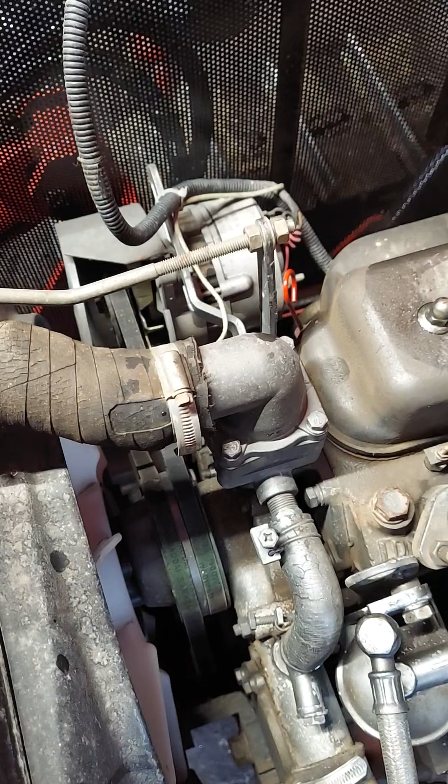But while I was changing the oil, I noticed a couple things and thought I'd share it. While you're working on anything, keep an eye out for things that could cause problems in the future, to save you some time and headache. So while I was putting oil in, this is your oil fill cap, by the way.

While I was putting oil into the motor, I saw this dry rot radiator hose. I thought, well, when I bring this thing in for its 150-hour maintenance, hopefully it lasts another 50 hours, I'll go ahead and swap out the radiator hoses. And while I'm at it, change out the coolant.

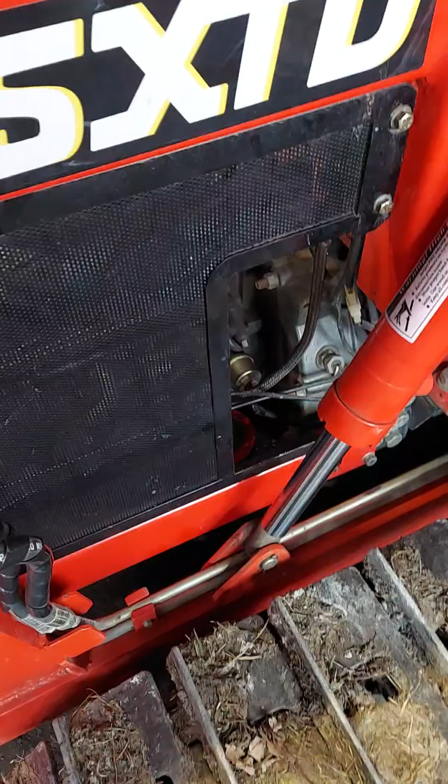Doing that while you're working on machinery, looking for problems, saves you time, because now I can call the parts company and have them ship it. No rush freight, it'll probably be free shipping. Doesn't matter if it gets here tomorrow, doesn't matter if it gets here next month. I'm going to get it, I'm going to have it in time. So that's just something to keep in mind while you're working on stuff.

Keep an eye out. Check your rubber lines, check your fuel lines, look for bare wires, things like that. It'll save you in the long run.

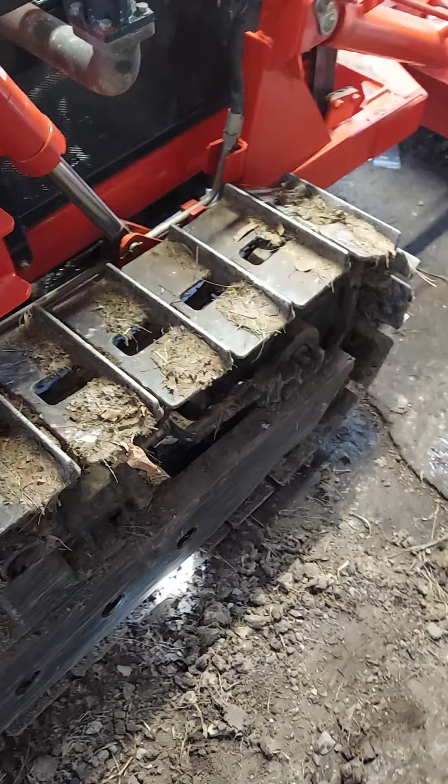The other thing I did between the last video and this video was I tightened the tracks. If you remember from the last video, this track here was really loose. So I went ahead and tightened it.

But I thought, for a first-time buyer, or maybe you have this dozer and just don't know how, or you lost the manual, whatever, it's a pretty simple procedure. Park it on a level, hard surface, is what the manual calls for. I'm fortunate enough to have converted this old barn into a shop with a concrete floor. So yeah, I'm lucky in that way.

But if you're working out in the field or whatever, take your blade and level you off a spot. Yeah, it'll take another 5 or 6 minutes, but it's worth it, because if this is not on level ground and you adjust this track, you might over-tighten it, or not tighten it enough, because the weight of the dozer, being pushed forward or backward, will affect the droop on these tracks.

So get it as level as possible. Put it on blocks, do whatever you need to do. Put some timbers under the blade there and pick the front of the dozer up till you get it level. I mean, there's 1,000 different ways to do this. But anyway...

This is a lock nut here, and I believe it was 18 millimeter. You just loosen that, don't take it out, just loosen it. I loosened this one 5 or 6 full rotations, and that'll give you enough play to turn this.

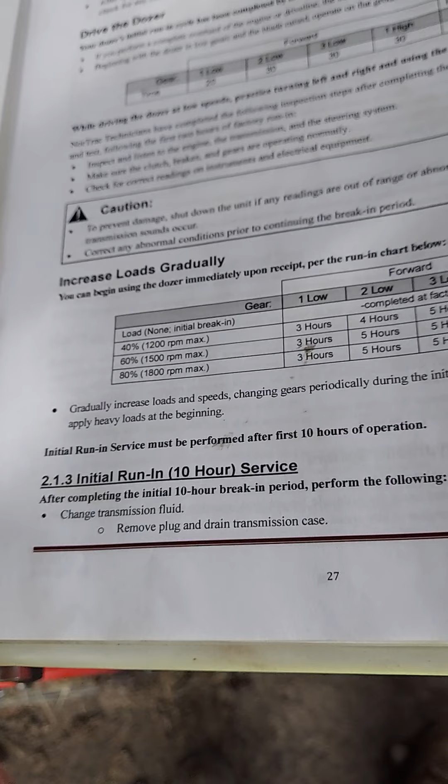Another thing I touched on in the last video, actually I turned to the correct page in it and just didn't even notice, was the 10-hour break-in. It's called the initial run-in 10-hour service. And this is the important one, the one where you run your dozer for 10 hours.

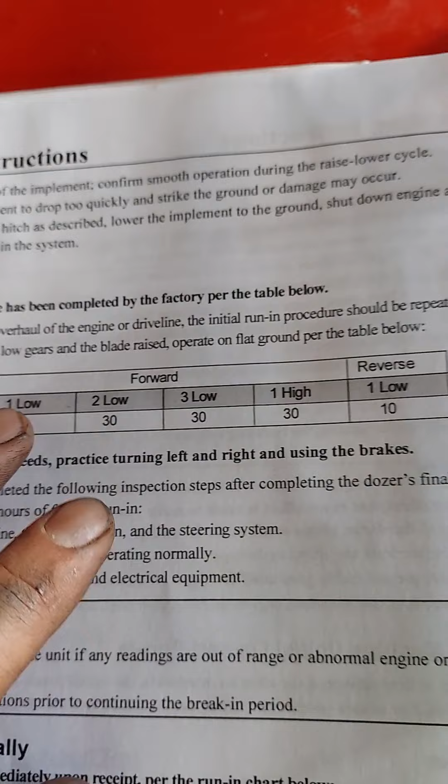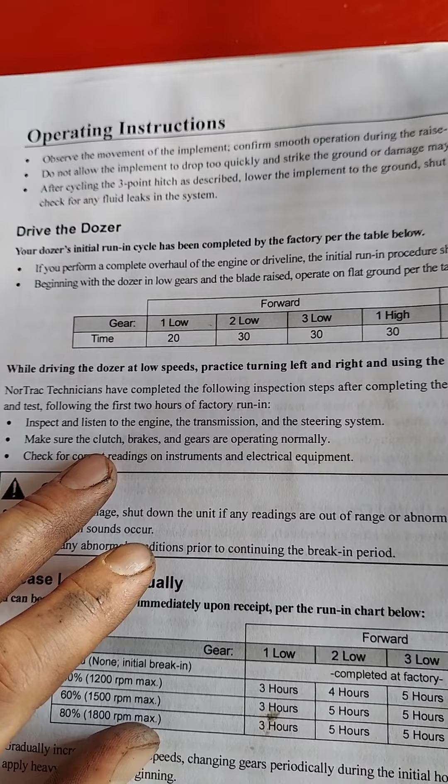And in that 10-hour period, they recommend, I believe these are the hours - driving the dozer speeds, practice turning left using brakes, inspect, listen to engine, make sure - I believe these are the hours that you run it. It's been a while since I've done this.

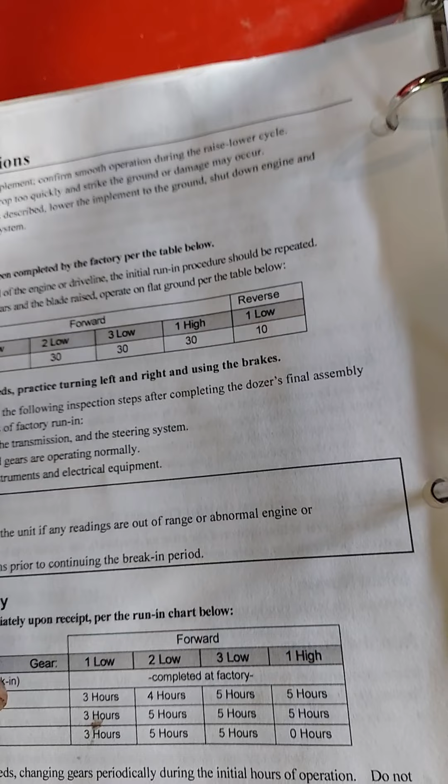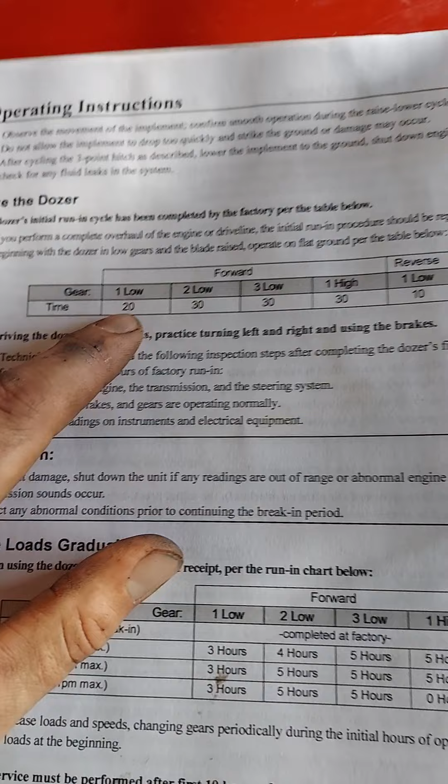I believe I followed this to the hour. These are not minutes - if they are, I just overdid it. But for the first 20 hours, run this thing in first gear low. For 30 hours, run it in second low. The initial break-in is going to take you up past your 100-hour service.

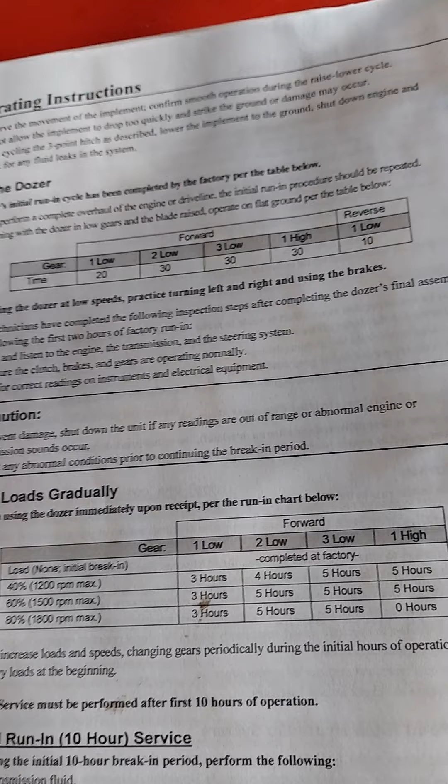I'm going to double check on that. I don't want to tell you right or wrong, but that's how I did it. I used these as hours, not minutes.

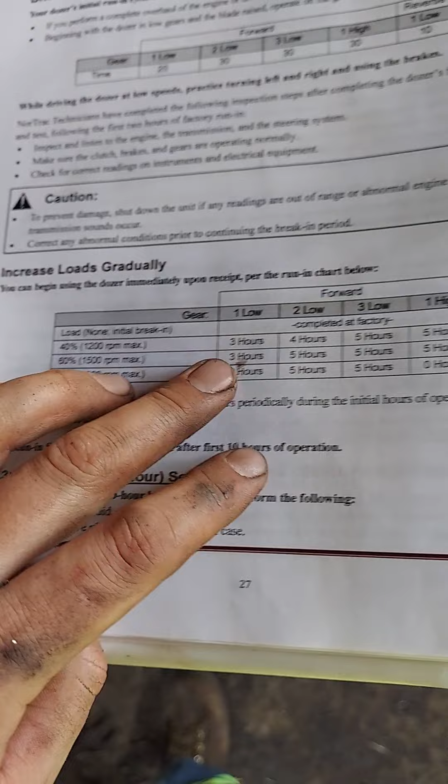This just touches up on that - your load percentage. How I did this was I used the blade. So first one, 40%, 1200 RPM max for 3 hours in first gear low range.

When I was moving dirt, I only used 40% of this blade. For the first few hours, I just barely scraped. You can actually kind of see my wear mark right here.

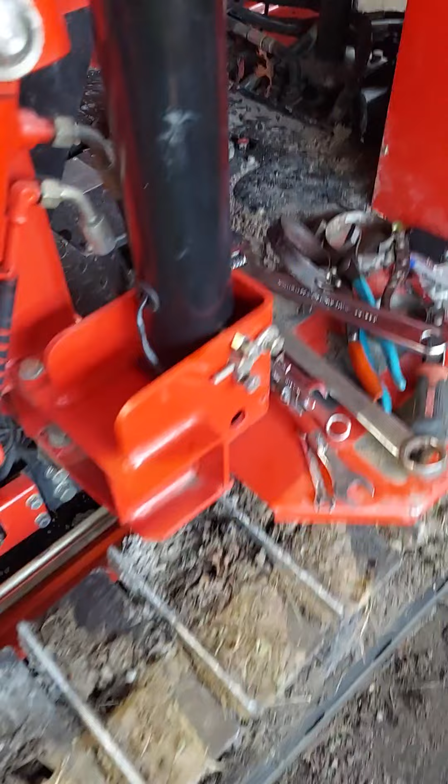It's a pain, I know, because you don't get much done in this first little bit, but trust me, it's worth it. You don't run into the problems that you run into on these reviews that you read.

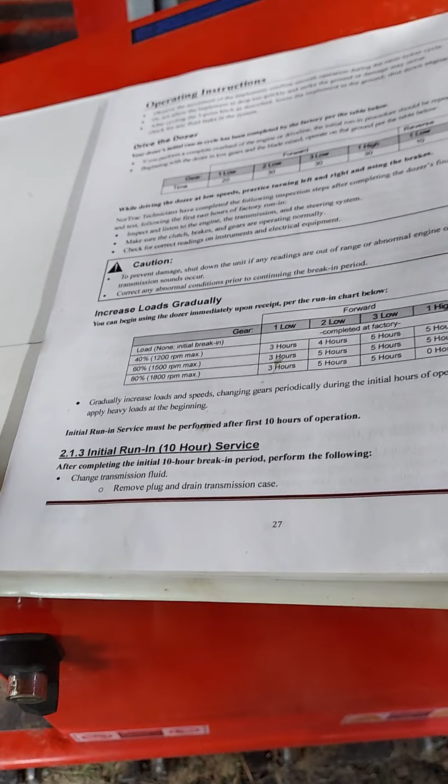But anyway, back to the initial 10-hour service. Once you hit your 10 hours, change your transmission fluid. The plug - well, not the plug, but where you check it and fill it - is right here.

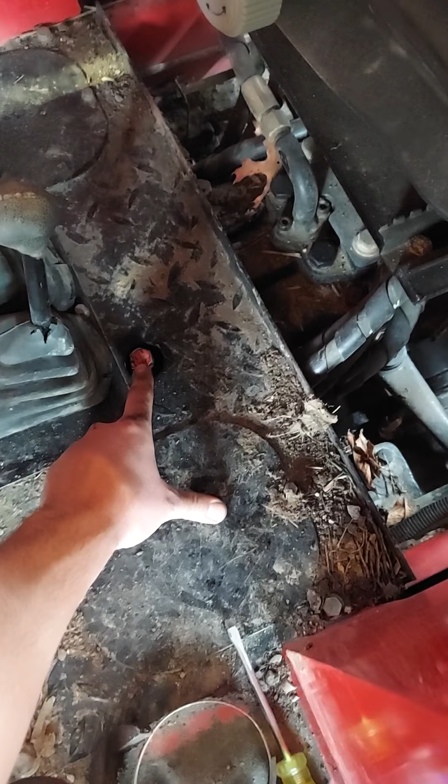And this reminds me too, all the plugs and checkpoints and fill points on this dozer are painted in red, so that way they stick out. It's so you don't accidentally turn the wrong bolt.

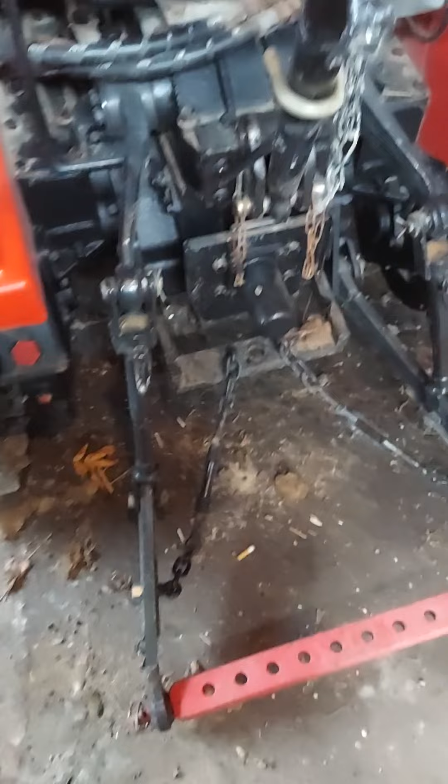Here are your final drives where you fill, drain, and check. Your transmission plug, when you drain this, will actually be right below your gear shift, on the bottom, that's the side of the transmission. Right underneath there's a red plug, and that's the one you remove.

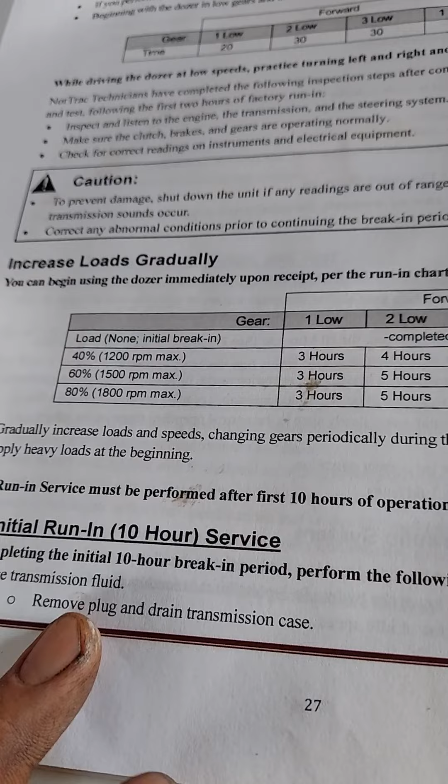And I forget the capacities, but change that, and you actually don't have to change that again, I think, till the 200-hour point. Change your oil, change your filter, inspect all fasteners.

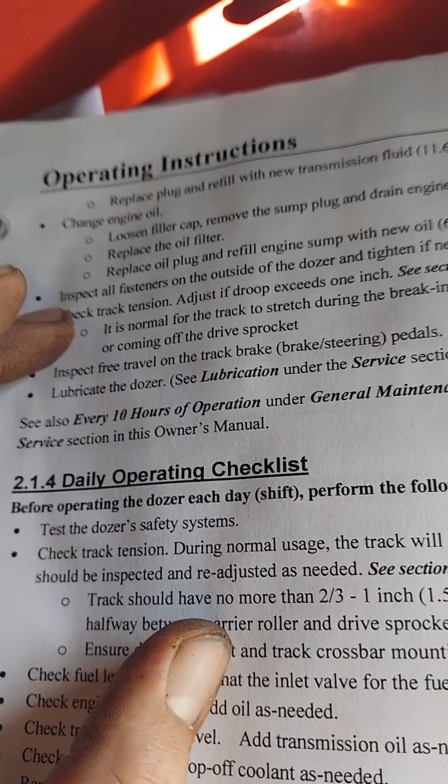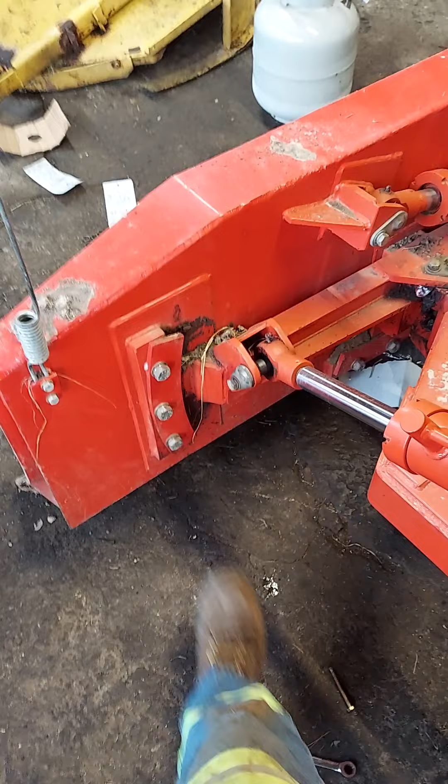I kind of skipped that just because there were no signs of anything being loose. The one thing I did check, though, was my blade, all these bolts here. The torque specs are in the manual as well.

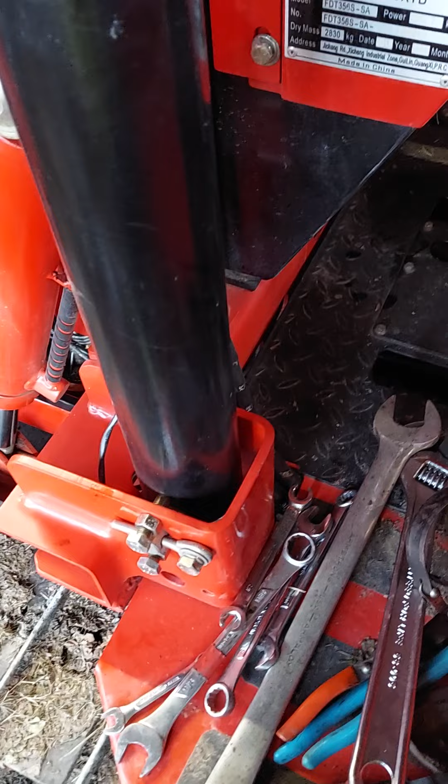I didn't fool with the covers. The ROPS, your rollover protection, I checked them. And everything I checked did not need retorqued - they all clicked where they were supposed to be at. So, you take that with a grain of salt.

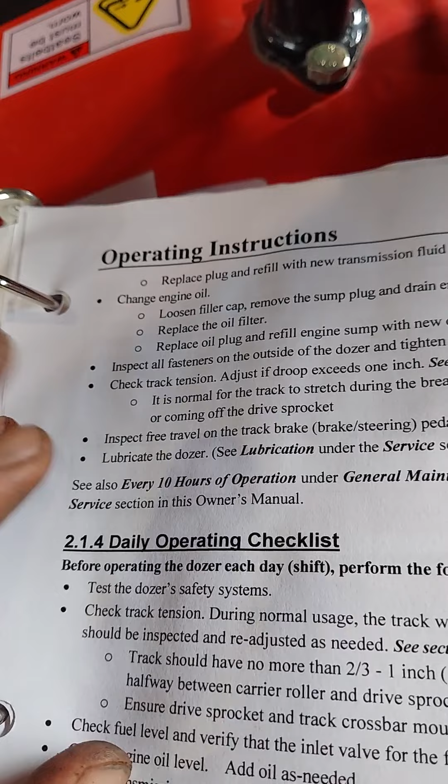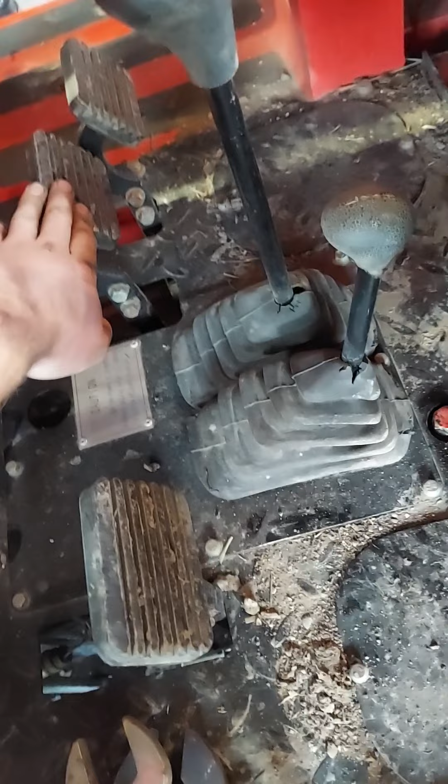Inspect free travel on the track brake. If you're wondering, what they mean by free travel is how far this moves before it engages. And these are still in really good shape, the travel's still really good on both of them.

But where you would adjust that is on these linkages - try to get my hand out of the way. I don't know if you can see that bolt there or not, but you loosen that bolt and you turn that turnbuckle, and that's how you will adjust your free travel.

I haven't had to do that yet. I'd say for the manual's purpose, it's just a formality. And then lubricate the dozer.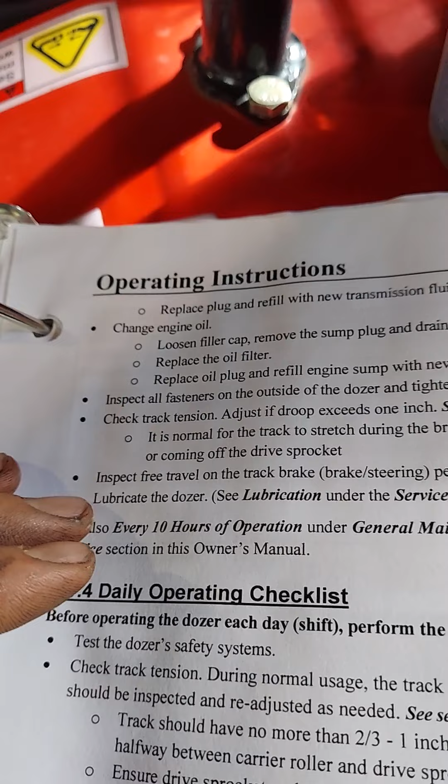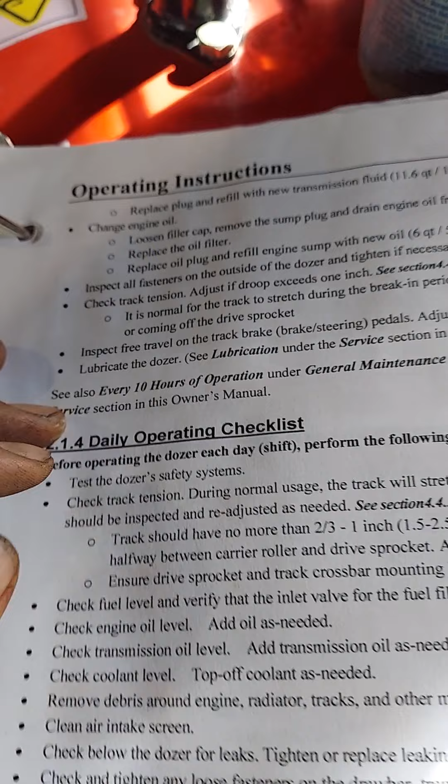That's something you should always do anyway, before you start any day or at the end of every day. Of course, every 10 hours of operation, you have your general maintenance, which covers the greasing and lubrication.

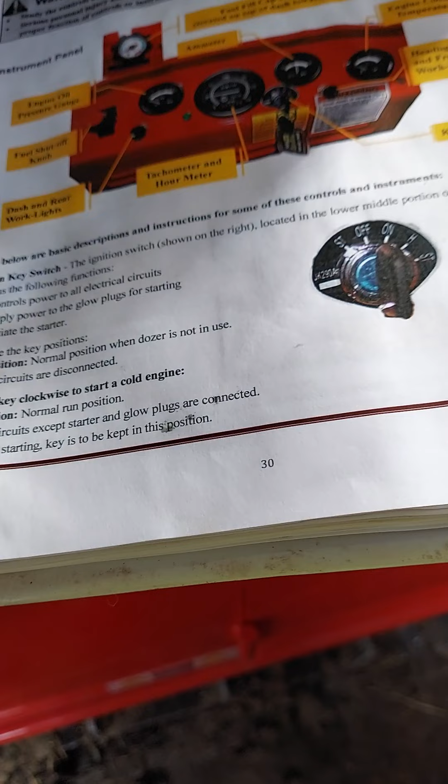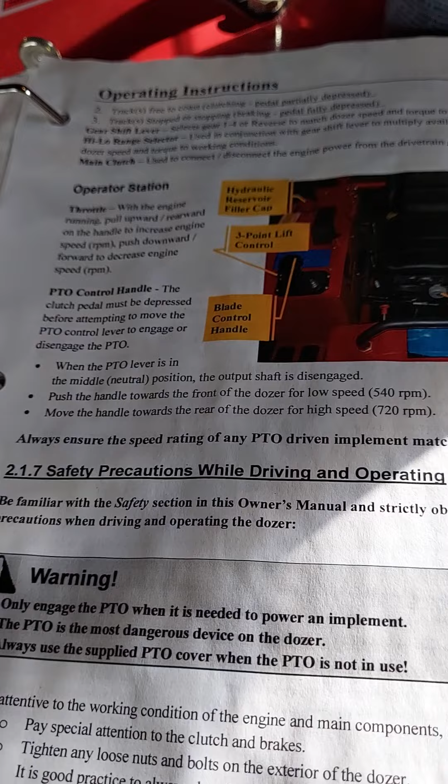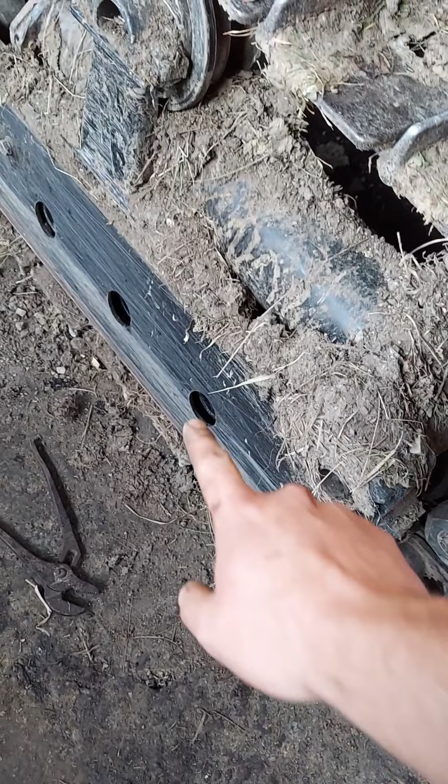The one thing this manual is not good at is - it's a picture manual, but they do not do a good job at marking and labeling the grease points. Just on one side here, you have 1, 2, 3, 4, 5, 6, 7, 8...

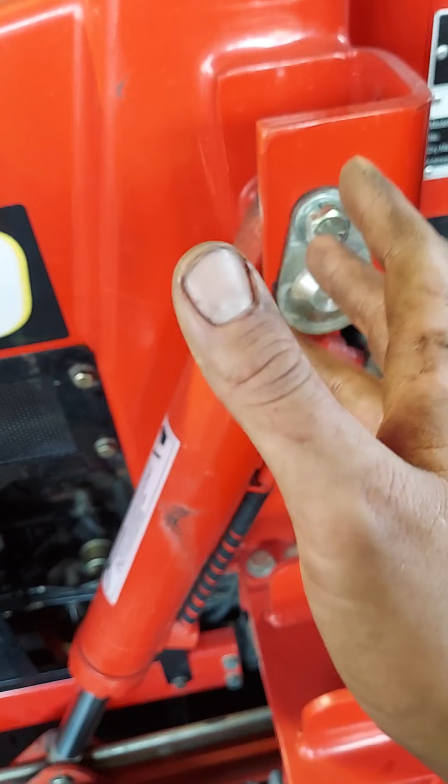9. General rule of thumb, by the way, anywhere you have a pin or moving part swiveling, look for a grease fitting because you'll have one.

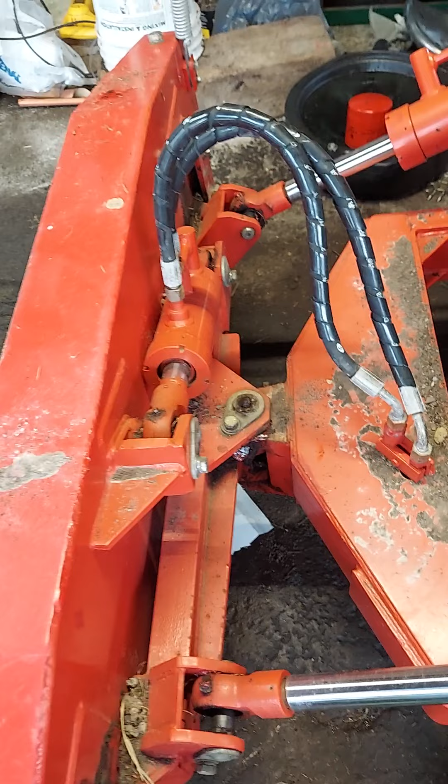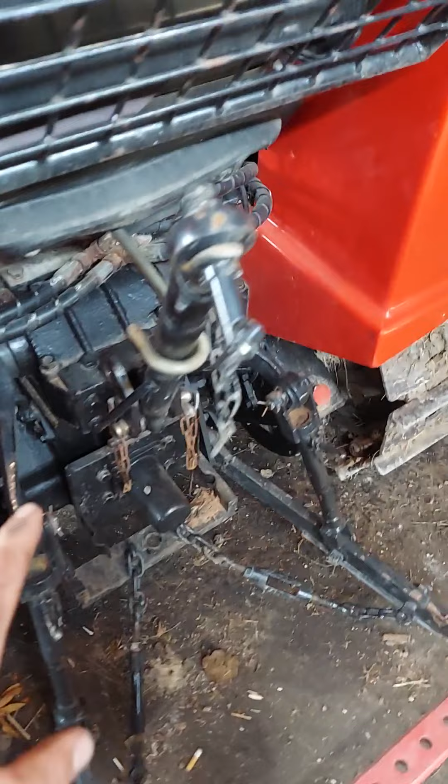There are grease fittings under the chassis too, which I just don't feel like getting on my creeper and going under there to show you. But you've got 5 just under this transmission and hydraulic pump area - there's 5 grease fittings under there.

Just a general rule of thumb, if it moves or rotates or spins, it's got a grease fitting, and it's going to need lubrication. So, yeah, that'll wrap that up.